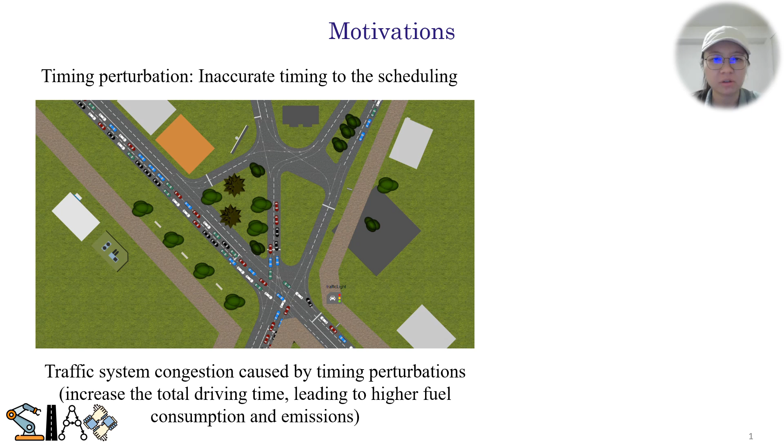This effect also happens in other scenarios, such as flight delays, which can lead to longer travel time and a huge amount of extra energy cost.

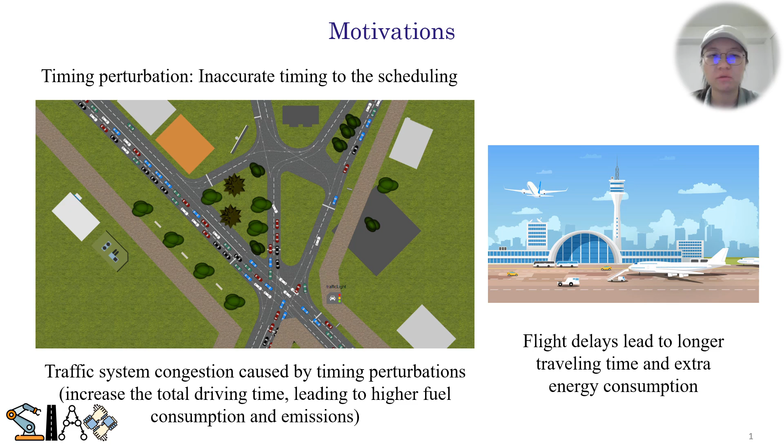Similarly, timing perturbation can dramatically degrade control performance. Here is a simple stabilized control system. Inaccurate timing in the control signal can cause the system state to deviate far from the original trajectory, leading to instability.

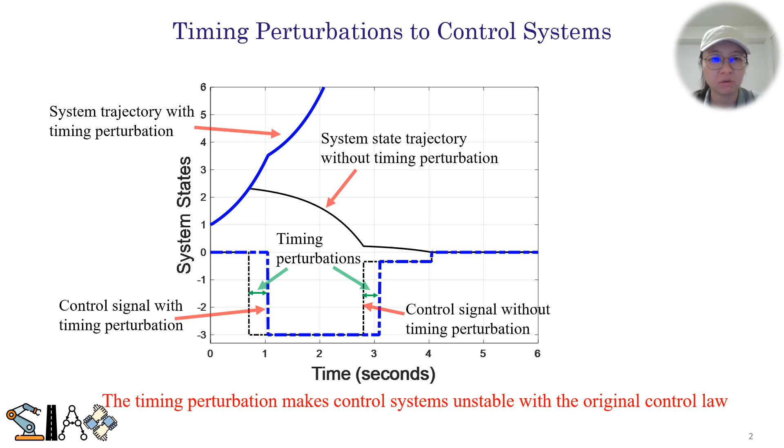In recent studies on timing perturbations, the focus is primarily on constant perturbations, time-varying perturbations regarded as functions of time, or random perturbations modeled as Markov chains obeying a certain distribution. However, in reality, the timing perturbation can be purely random without knowing its distribution, which brings a big challenge in modeling.

On the other hand, recent research handling perturbations with tube-based MPC has discussed various types of systems. However, the focus is only on bounded additive perturbation in system dynamics. If we consider inaccurate timing with a tube-based MPC approach, it becomes difficult since the asynchronization makes it hard to separate the error dynamics.

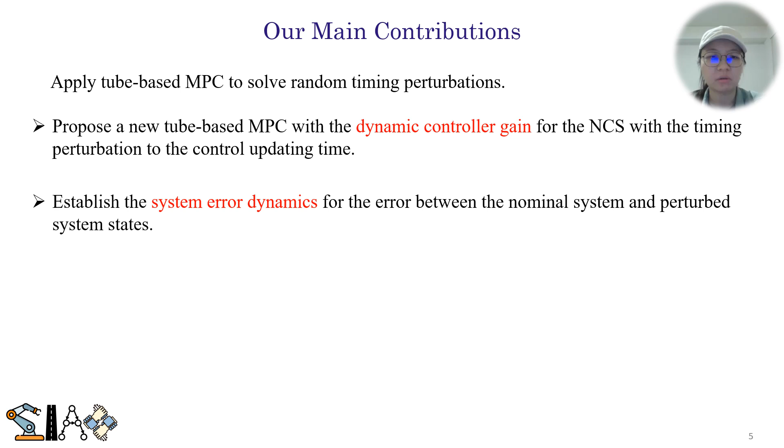Based on the issues above, our research mainly focuses on random timing perturbations and solves the problem by applying a tube-based MPC approach. Our main contributions are: first, we propose a new tube-based MPC with dynamic controller gain; second, we establish the system error dynamics; and last, we obtain the stability condition of the error dynamics.

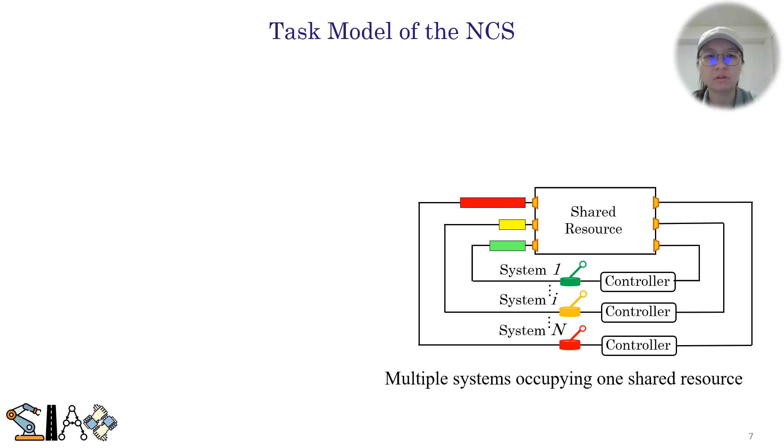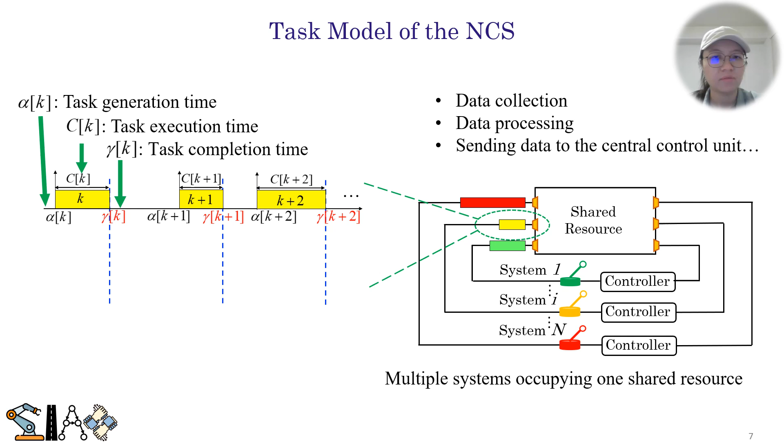Let's start with our problem formulation. In the network control system, multiple systems use one shared resource, and each system has a sequence of tasks to operate, such as data collection, data processing, etc. In this task model, alpha is the task generation time, C is the execution time, and gamma is the task completion time. Because the measurement of the system state is only accessible to the controller at gamma, gamma will be the control updating time. So in our system model, the control is a piecewise constant signal.

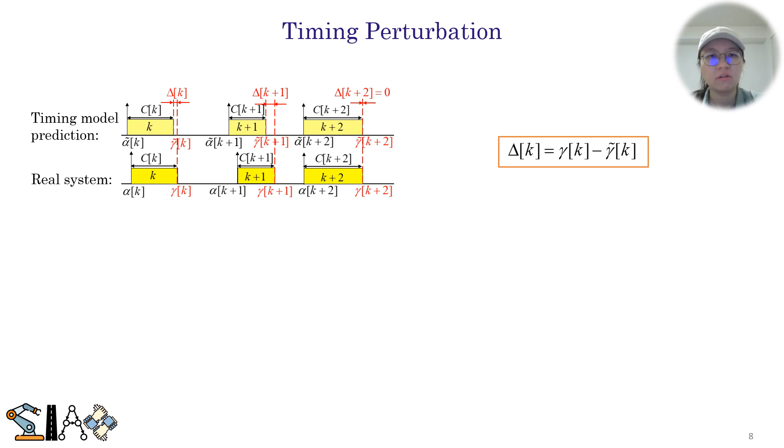For the timing perturbation, we define it as the difference between the actual and estimated control updating time. Previous work has proved that the difference between the actual and estimated task generation time is non-negative and non-increasing, and the task execution time C is normally predefined by design. We assume that the random timing perturbation is non-negative and has a finite constant upper bound.

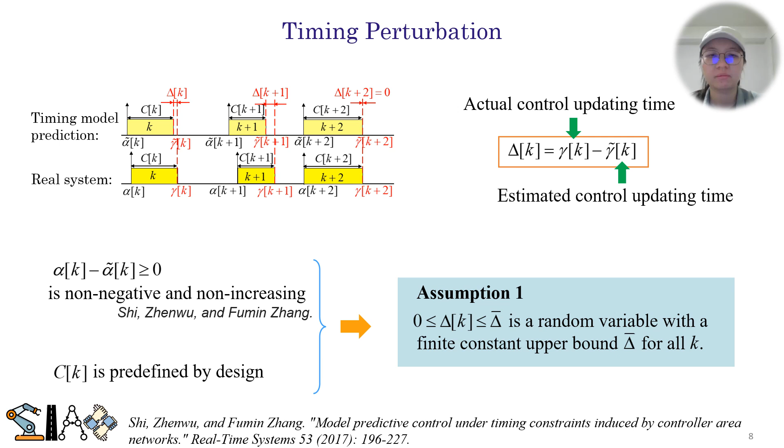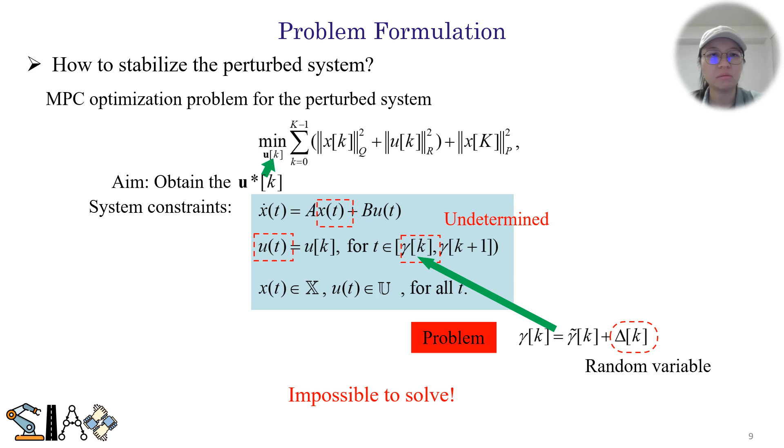To stabilize the perturbed system, we first try to use normal MPC. However, since the timing perturbation is a random variable, the actual task completion time will be undetermined. Then the control and state will also be undetermined, so it's impossible to directly solve this.

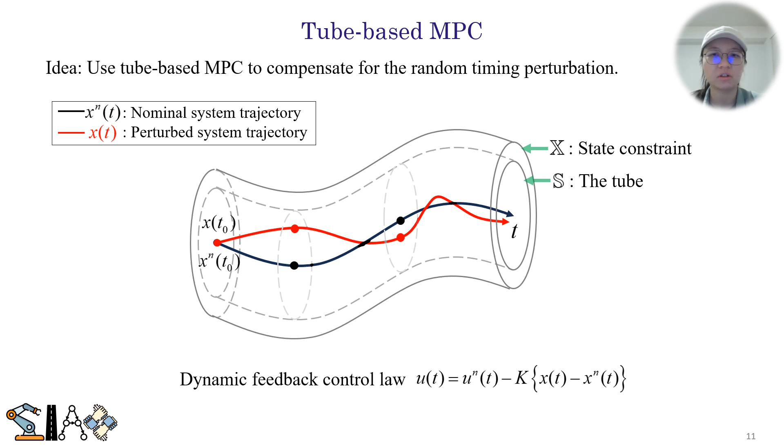Our solution is to use tube-based MPC to compensate for the random timing perturbation. The main idea of tube-based MPC is to design a dynamic feedback control law that compensates for the deviation caused by perturbations. The robust control is the sum of nominal control and the correction term. With this control law, the perturbed system trajectory can oscillate around the nominal trajectory and stay within the tube.

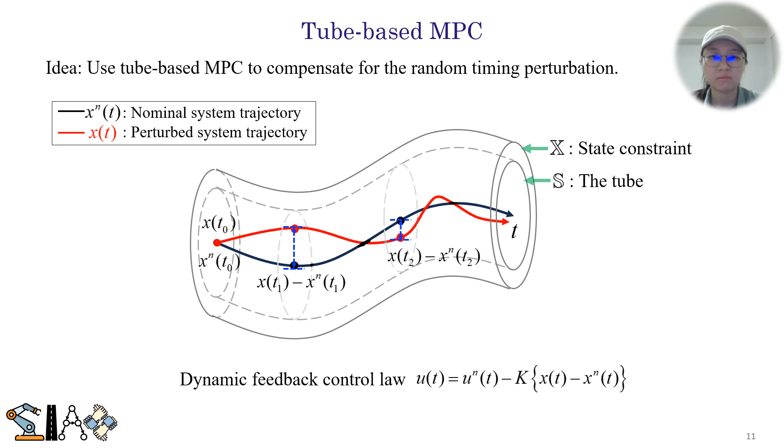To distinguish differences in system dynamics, we define the nominal system as the system without timing perturbation. Xn is the nominal system state, and Un is the nominal control, which updates at each estimated task completion time. X is the perturbed state. U is the perturbed control, which updates at each actual task completion time, later than or equal to the nominal control.

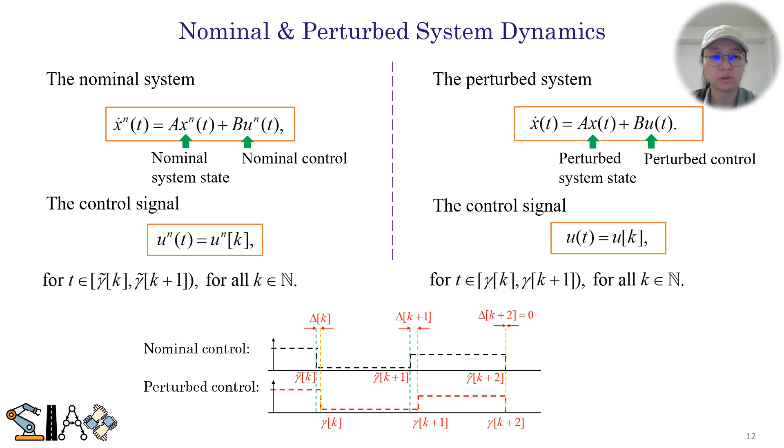Our solution has two steps. The first step is to formulate the MPC optimization problem only for the nominal system.

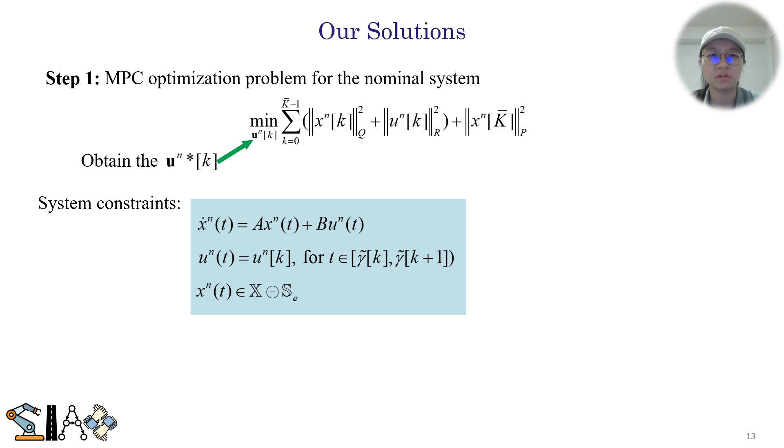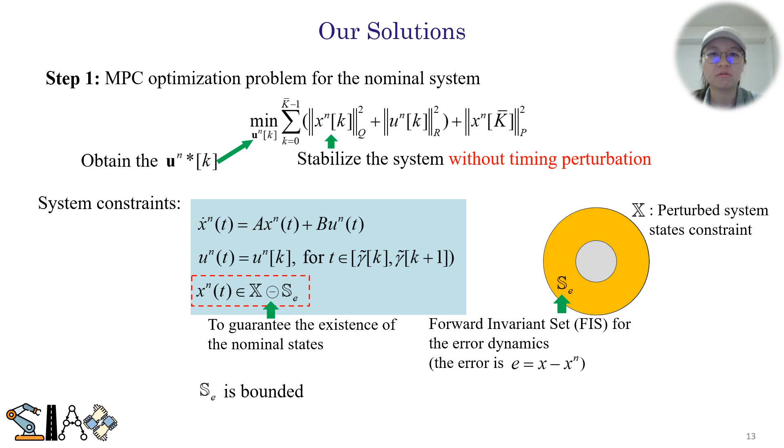One thing to note is that the last constraint is to guarantee the existence of the nominal states, where X is the predefined perturbed states constraint, and S is the forward invariant set for the error dynamics. After proving the forward invariant set is bounded, the difference of these two sets should be non-empty to find a feasible solution.

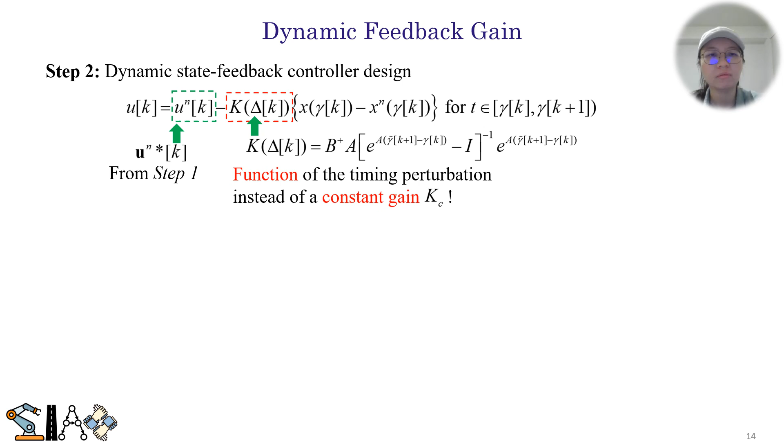This figure is to show that our dynamic control is computable. At the actual task completion time, since we know the current time, the nominal state at gamma k is computable. Also, because the perturbed state at gamma k is measurable, we can compute the difference between two system states, which is the deviation caused by the timing perturbation.

Besides, the dynamic gain is computable because the variables in this formula are known, where gamma tilde of k plus 1 can be predicted by the timing model from previous work, and gamma is the current time.

Then, by applying the dynamic control law to compensate for the deviation, the perturbed system trajectory can oscillate around the nominal trajectory.

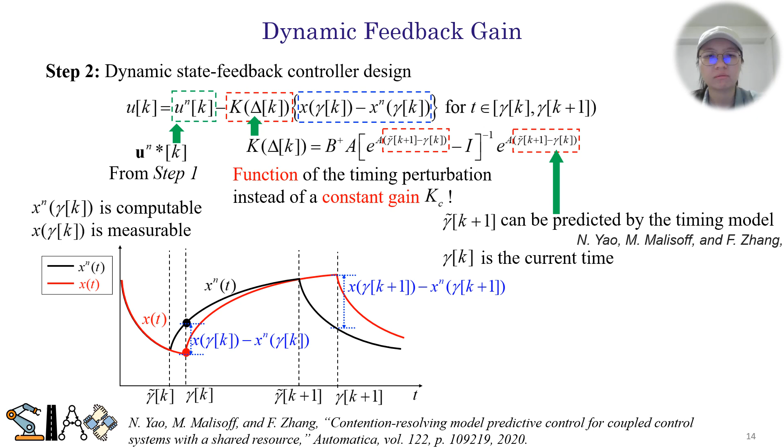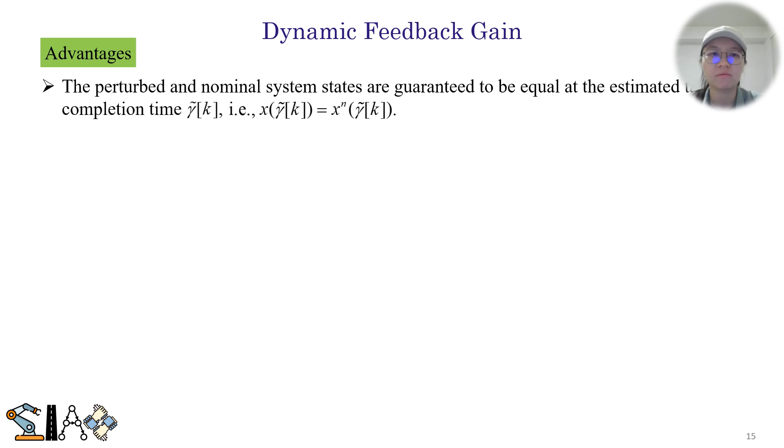Our approach has two advantages. First, the perturbed and nominal system states are guaranteed to be equal at each estimated task completion time, and this is proved by lemma 1.

This brings us the second advantage. When the timing perturbation begins to be zero, starting from one estimated task completion time, the perturbed system trajectories can immediately converge to the nominal system trajectory and perform the same as the nominal trajectory.

The benefit from that is that as time propagates, the task completion time estimation becomes increasingly accurate. Until the timing perturbation approaches zero, the performance of the perturbed system will be almost identical to that of the nominal system.

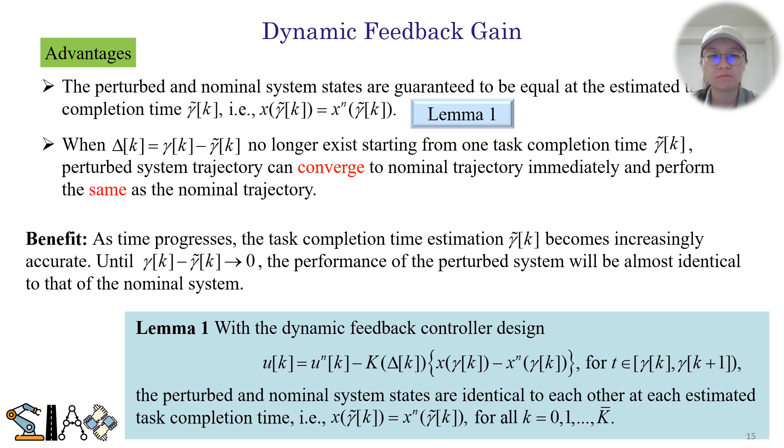Here we use an example to compare our dynamic law with the traditional tube-based MPC. For the traditional method, we compute the constant controller gain for a second-order system.

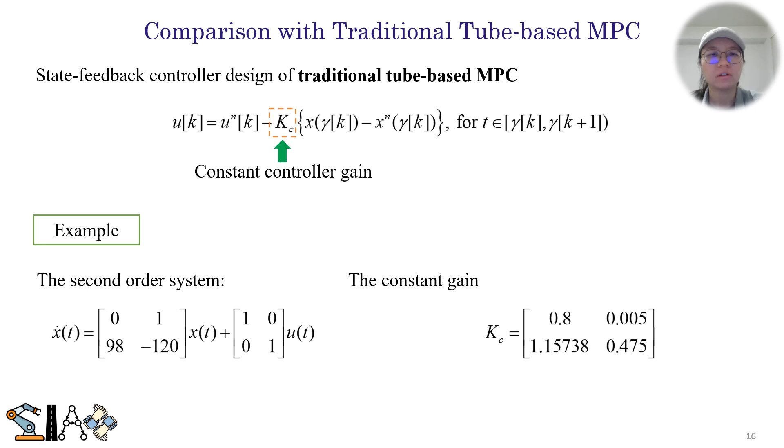In the simulation, the black solid line is the nominal trajectory designed to track a square wave. For the traditional tube-based MPC, the green dashed line is the perturbed trajectory. It's easy to find that there is always a large deviation between the perturbed and nominal states.

This is because during some time intervals, such as the time between gamma 7 and gamma 8, the closed-loop system matrix is unstable due to the random timing perturbation. However, with our approach...

The red dashed line is the perturbed trajectory. It's easy to verify that the perturbed and nominal states are equal at each estimated task completion time and bounded at the actual task completion time.

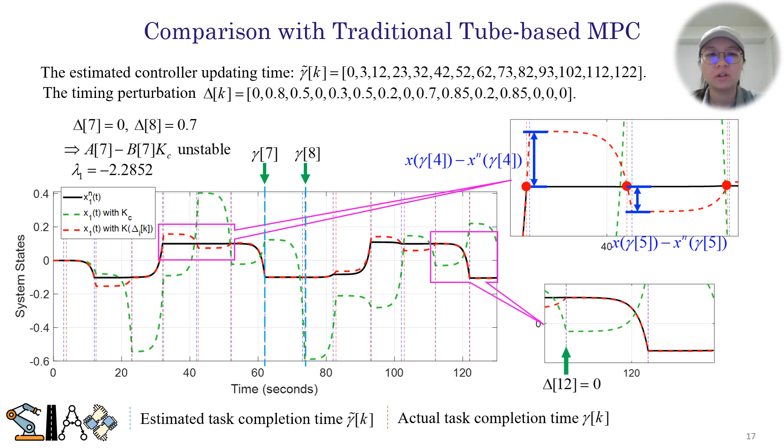Except for this, notice that when the timing perturbation begins to be zero, such as delta 12 is zero, the perturbed trajectory performs the same as the nominal trajectory.

For the system analysis, our target is to prove that the perturbed system states are bounded to make sure its trajectory stays within the tube as time propagates.

To achieve this, in step 1, we derive the error dynamics by discretizing the perturbed and nominal systems, which is presented by lemma 2,

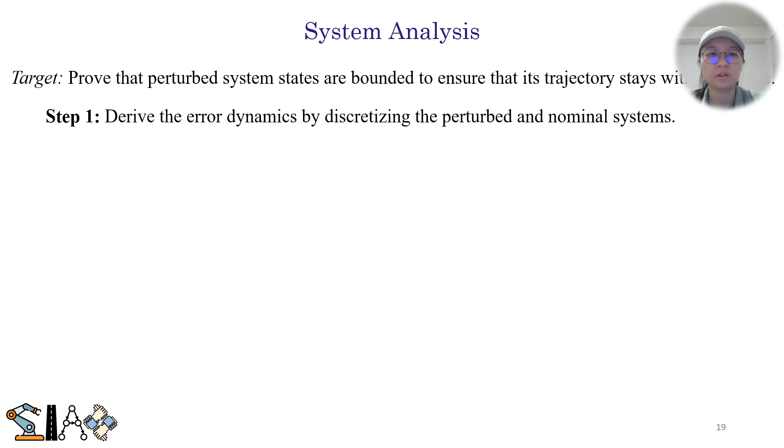where the closed-loop system matrix and the additive disturbance are functions of the timing perturbation.

In step 2, we need to prove that there exists a finite forward-invariant set for the error dynamics.

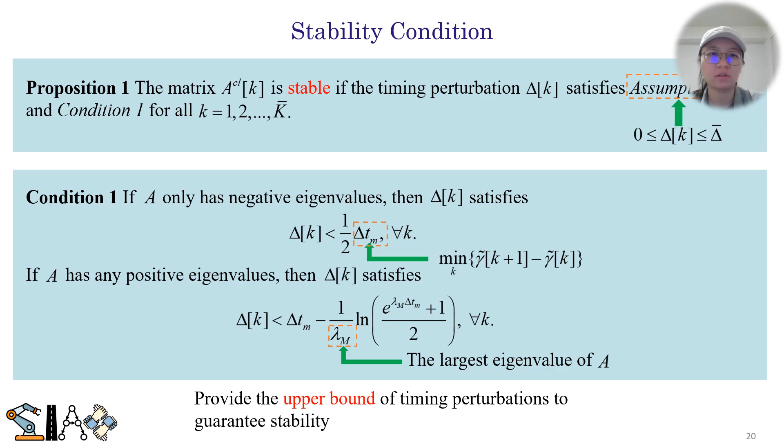First, we prove that the closed-loop system matrix is asymptotically stable through proposition 1 and condition 1, where condition 1 provides the upper bound of timing perturbations to guarantee stability.

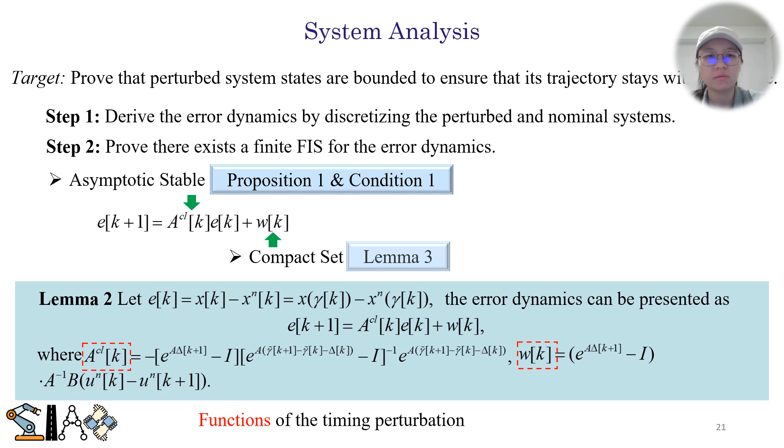Then we prove the set constructed by all the additive disturbances is compact through lemma 3. Based on the above conclusion, the forward-invariant set can be proven to exist and be finite by theorem 1.

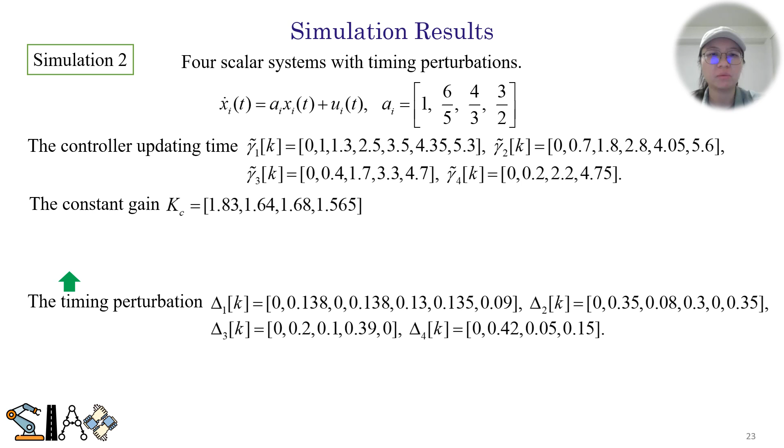In our simulation, we have 4 systems with timing perturbations. Then, with the constant gain for the traditional tube-based MPC and the random timing perturbation that satisfies condition 1, we get the trajectories for all systems.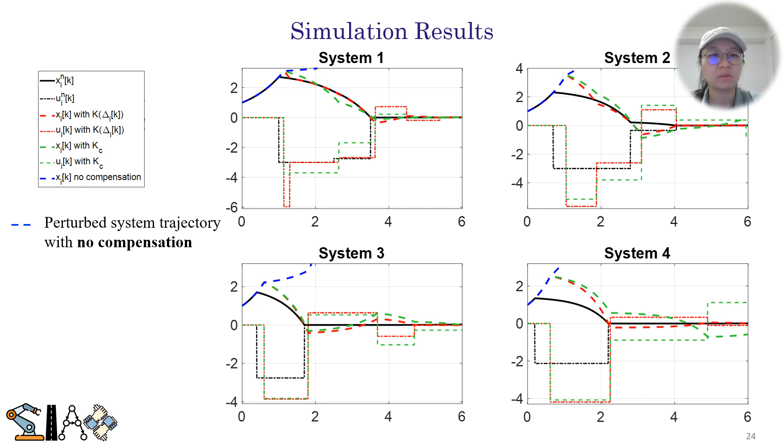The blue dashed line denotes the perturbed system trajectory without any compensation. It is obvious that it deviates from the nominal trajectories.

The green and the red dashed lines denote the perturbed trajectory with constant and dynamic gain, respectively. This figure indicates that the green line has a larger deviation, so our approach is better.

Especially when the timing perturbation begins to be zero, the red line converges to the nominal trajectory right away and performs the same as the nominal trajectory.